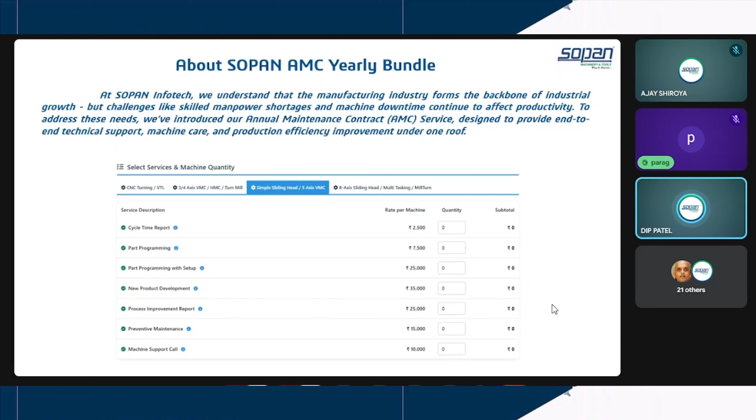Other than that, we are also providing engineering services: design CAD, analysis CAE, CAM, CAE, 3D printing, and also product presentation work.

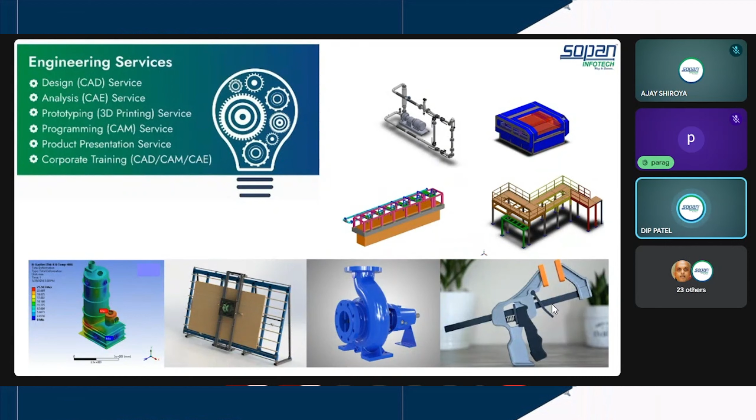If you are not working on a large scale and you just need service-based work, like CAD design, FEA analysis or simulation work, or CNC part programming, then you can just go through our website or contact us. We can help you.

So now we are going on our main topic, cabinet vision. Cabinet vision is a product from Hexagon, and the product is basically mainly focused on only panel work. If you are doing solid wood work, it will not help you. Many of you have the doubt whether this product will work on solid wood or only on panel work - cabinet vision will work only on panels. If you need any kind of panel work, you can do it in cabinet vision.

So what is cabinet vision offering to us? As you can see on the slide, the right balance of powerful features and ease of use. If you are creating closets, kitchen units, living rooms, also residential projects or commercial projects, you can do everything in our cabinet vision.

Mainly the cabinet vision product is not only focused on design. We have a complete solution of design to production. It means if you are designing, then you can render the photos just like you can see on the screen. You can render it, you can create reports, and after that you can create optimization, and also you can get CNC output of the panel work.

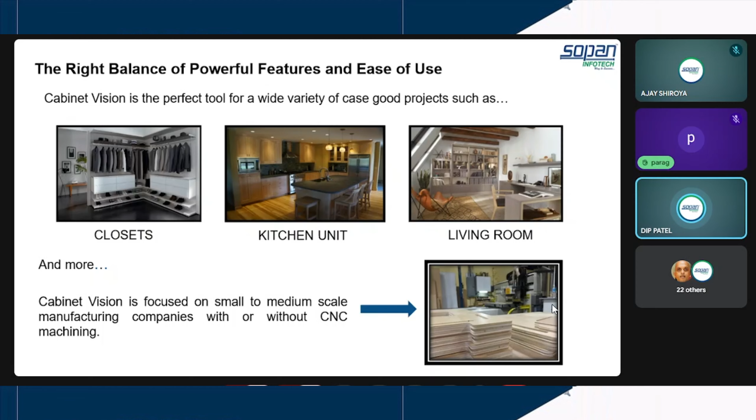So these are the market panel processing. If you are working in residential or commercial projects, you can get this in our cabinet vision.

So we will go through the traditional method that our industries are currently using. First, if customer comes, then we have to design it. After that, we have to render it to show that after completing your kitchen process, the final output will be like this.

After that you will create bidding - if you are asking what bidding is, that's just quotation for you. After that you will create the report of what ply you will use, what materials you are using, hardware, laminate or everything - it covers in the report.

After that, we have to create drawings, so we can get the workers and they will check what are the measurements and what we have to do on the actual site position. After that, you will optimize those panel products, and then you will go to production.

So basically what is the industry currently doing? They are using some other software for designing, some other for rendering. Then they will use Excel, or create manually a report or bidding. After that, they will again use some other 2D CAD for the drawings. After that, they will use other software for optimization also, because in the same software in which we are doing designing or rendering, we can't get the optimization or the CNC codes. So currently they use multiple products for the same single output.

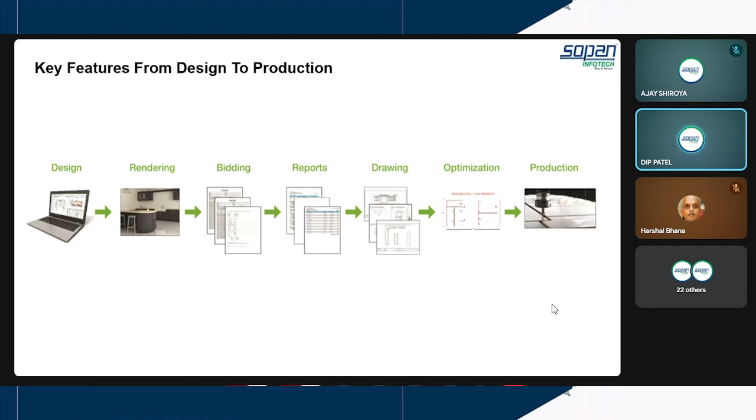So the first topic was the design. If any one of you is from the design field, you know that if I have to create a design, I have to do some groundwork, just like go to the site, take the measurements, and then create a 2D diagram of the entire project, whether it's the kitchen, the entire home, or an office. I have to create the entire project in 2D.

After that, if I show the customer this 2D plan, the customer will say this can also be provided by the builders. So what we have to do is, if I have created a 2D drawing, I also have to do it in 3D, because the customer doesn't get the idea from 2D drawings alone. We are from the industry so we understand 2D drawings, and the carpenter will also know what is mentioned in them.

So in Cabinet Vision, you don't have to create the entire project like traditional methods. What are the traditional methods? If we take AutoCAD as a reference, we have to create a single line from the wall, then create a single cabinet, then tables, and whatever else we need in our project. We have to create each and everything by hand.

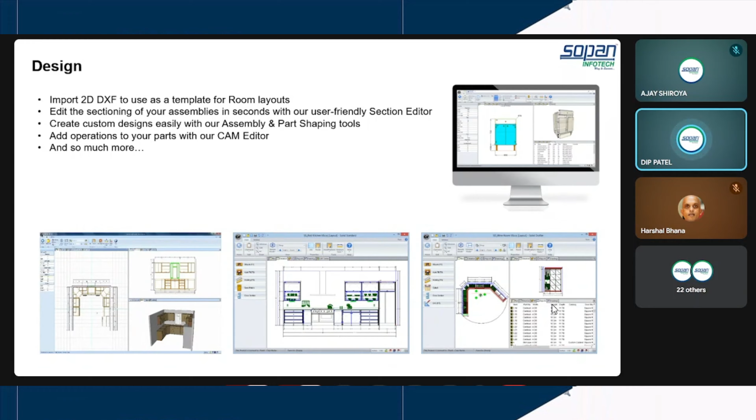In Cabinet Vision, you can just drag and drop whatever you need. If you need a cabinet, you can drag and drop it from our library. If you need a chimney, a gas stove, whatever product you need, you just drag and drop it. We have a basic library of cabinets, closets, and upper cabinets. Other than that, if I need some customized cabinet for a project, I can create it and save that single cabinet in my library, so in future if I need one, I can just drag and drop it from the library into my design. Next step is rendering.

As I said, if I have created the design in 2D, I then have to create the 3D for the rendering work, because the customer needs the final output so they can visualize which color will suit or which type of design they require. In Cabinet Vision, you don't need to create the 3D model yourself, and you don't need to use another software. You just drag and drop from our library, whether it's a cabinet, closet, or upper cabinet, and the software will automatically generate the 3D part.

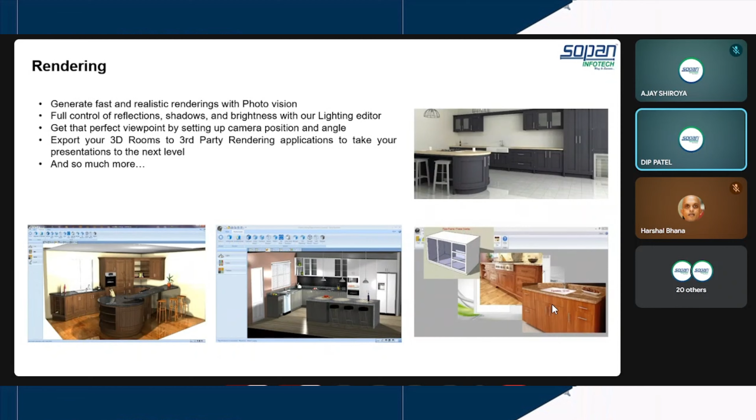Also, you can generate the rendered product. So if the customer requires the final rendered photo of what the kitchen or office looks like after the final work, you can show it through the rendering in your software.

Then we have a bidding module. What is the bidding module? When a customer comes to your office, traditionally we have to remember everything, like material prices, rate tables, and labor prices. In that case, we can't properly quote what the customer will have to pay for the project. So in the bidding module, there are some options: you can set your material price, set discounts, set the rate table and labor charges, all within Cabinet Vision. So whenever a customer comes to your office and you finalize their design...

After that, you have a complete quotation type report: what are the products you are giving to him and what is the costing you are giving to him. Okay, so you have a basic idea of the costing, so you can negotiate better with the customer.

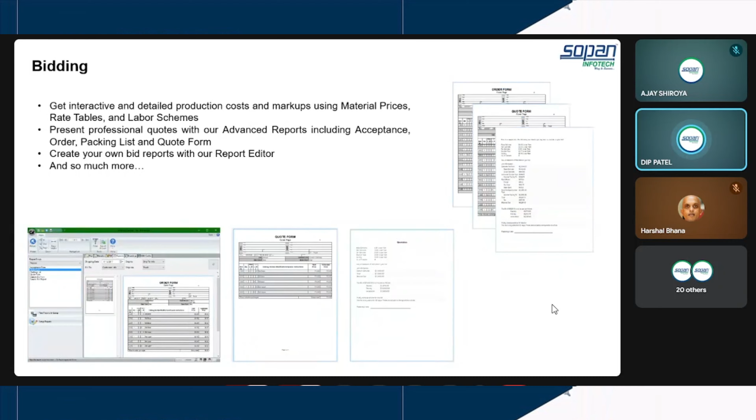So then next we have a report module. So basically, bidding is for the customer and report is for our use. Just like if I am creating the kitchen or I am creating the office work, okay, an entire office project, then I need an entire list: how many plies, how many cabinet hinges, what are the drawer boxes, what are the glasses, what are the panels, how many of them I need. Everything is mentioned in the report, so you can get a better understanding of your material requirement.

Okay, so in Cabinet Vision, you don't have to create a separate material summary, just like a cut list or door list. You don't have to create it separately. You will create this design, and our software intelligence will portray the report of what you have mentioned in the design. Okay, I will show you in a practical demonstration so you can get a better idea of it.

Okay, then next we have drawings. As I mentioned, if we have to create drawings, then we have to first finalize the 3D model. After that, I will give it to my designer and he will draw the drawings just like I have shown in the images. Okay. But in Cabinet Vision, you don't have to create them manually. We have software intelligence. You just select elevation, assembly, and part sheet drawings, and just by a single click, all of the drawings are created by the software.

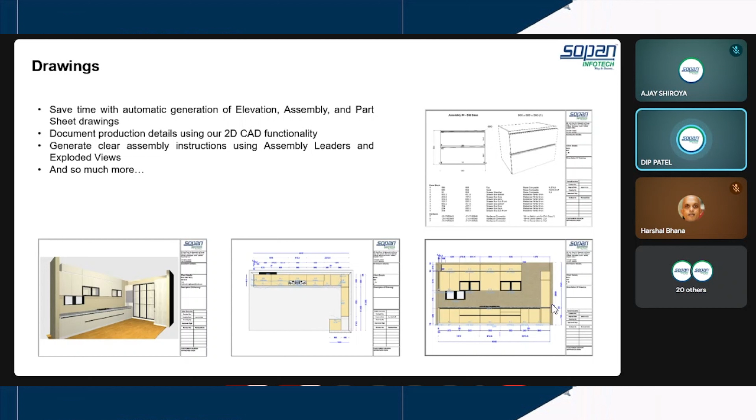If you can see at the bottom, okay, I have the planned 3D model. Then I have a top view of the model. Then I have an elevation view. Then I have an assembly sheet. You can get everything by just a single click.

After that, we have to optimize the product. The design is final. Okay, the quotation was final. Now I have to take the cutout from the machine. Then what are the traditional methods? What are people doing currently in industry? They will just cut out manually by panel stock, or they will just use the CNC machine software. Okay, they will manually input, like I need a 4 by 8 panel stock. Okay, and what are the panels, what are the sizes? Just like 300 by 200 mm, I need a cutout. I need a 200 by 200 cutout, and they will do it like this.

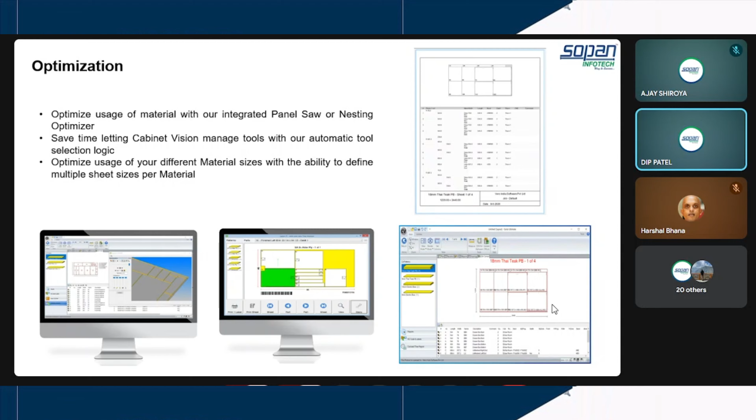But in Cabinet Vision, by a single click, you can nest all the sheets, however many materials you have used. Okay, if you are using 2 or 3 or 4 different types of material in your projects, then the software will automatically optimize each and every material and give you the final nesting output or final CNC output. After getting the CNC output, the machine will generate the NC code. You just need to put your NC code into the CNC machine, and the machine will cut out your entire project. You don't need to do it manually.

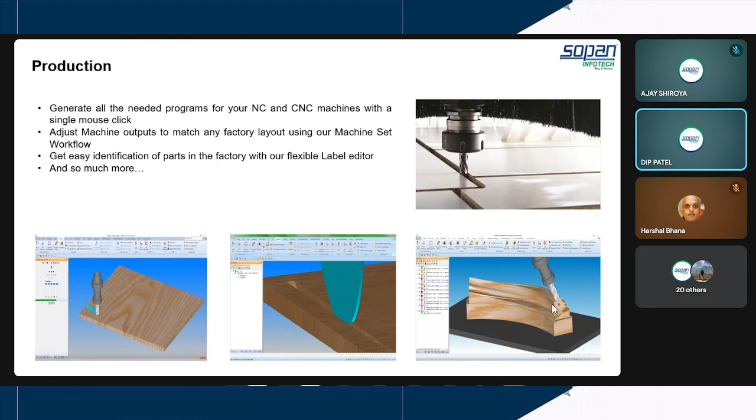Just put what sheets you are using, what the thickness is, or what the size of any panel stock or plies is. Okay, our Cabinet Vision software will automatically create the entire NC code for you. Okay, so for that I will show you. Wait a minute, I will just share my screen. Okay.

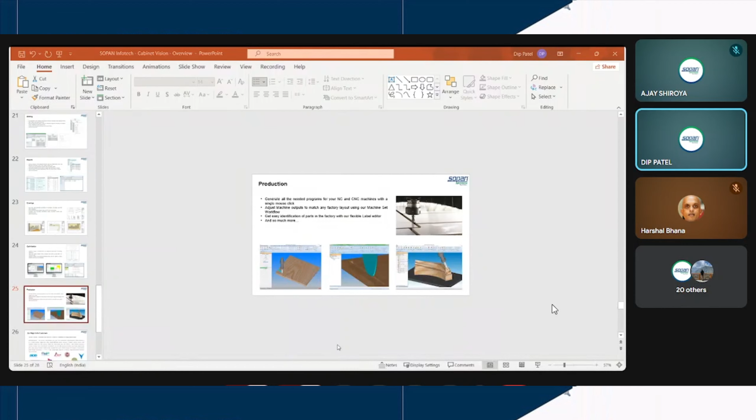Okay, hope it's visible. Okay, so now we are in Cabinet Vision. This is the basic window, the main window of Cabinet Vision, just like any other software we have, like Word, any CAD designing software or any machining output software. Here we have new job, open job, job recovery. Then we have catalogs, construction methods. Then we have open. Okay, so these are the options, and you can also access them from here.

Also, we have the recent job list, recent places. You can see it, and you can just identify this. This window is similar to your other software. If you are using any other software, you will just get the idea. Okay, so basically Cabinet Vision works on a design and panel stock basis. Okay, so what is it? I will show you. You just have to create a new job.

By clicking new job, the... we just say project, and the software will say new job. If we are starting our new job, then you have to write down some information, just like what is the job name. Okay, so just like I am showing you, SOPAN test model. You can mention PO number, you can mention description. Also, you can add customer name, address, city, contact mail. You can add everything.

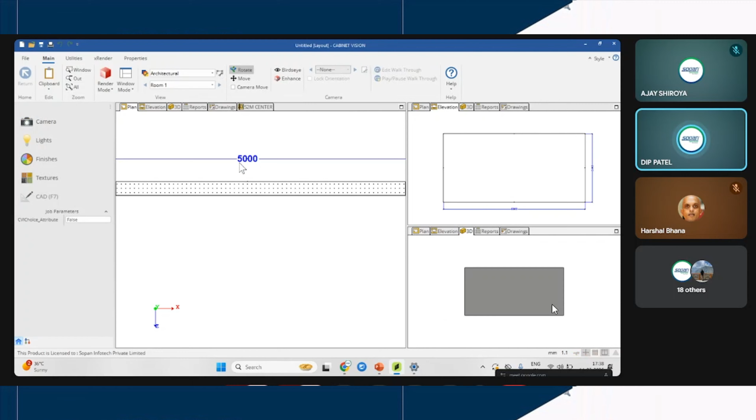So I will just split my screen. I will create the elevation here and the 3D here. You can see that this is the plan view, this is the elevation view, and this is the 3D view. You don't have to create the plan view, then the elevation, and after that the 3D. If you are creating the 2D plan view, the software will automatically create the elevation view. The software will also create the 3D view. Just see.

I will go to the normal window. Now I will place an object. So here is the material library: wardrobe catalog, then custom cabinets, meaning base cabinet, wall cabinet, tall cabinet, vanity cabinets, whatever you want. If you need anything other than this, you can just create it in Cabinet Vision and add it to this library.

After that we have a library of appliances, like washer, dishwasher, cooktops, small appliances, whatever you need in Cabinet Vision. You can also add appliances. If you have a 3D SketchUp model, you can add it in Cabinet Vision. Then we have some furnishing models, like different types of doors, windows, kitchen appliances, baths, toilets. You can use them from here.

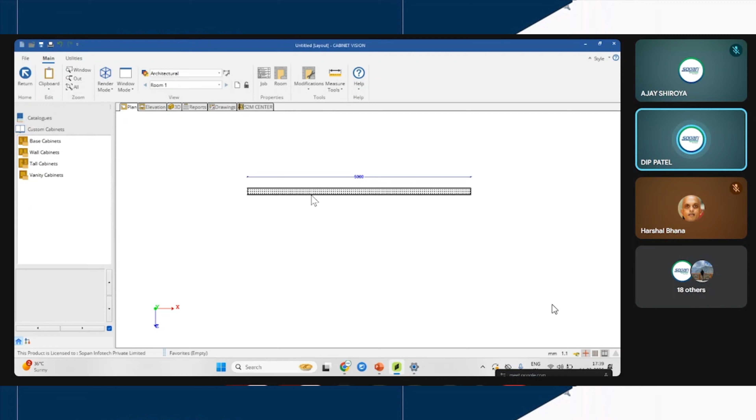Now I will show you what to do if I need just base cabinets, 4 to 5 base cabinets and 4 to 5 wall cabinets. Just base cabinet. I have a library: base cabinet, 45 base corner, 90 angle base corner, drawer stack. Different types of cabinets are here, which the standard companies are using. I have split my window so you get a better idea that you don't need to create an elevation or 3D view separately. So here I need a standard base.

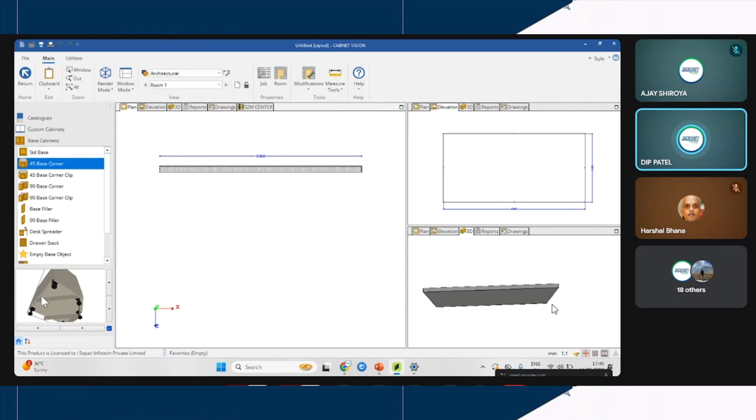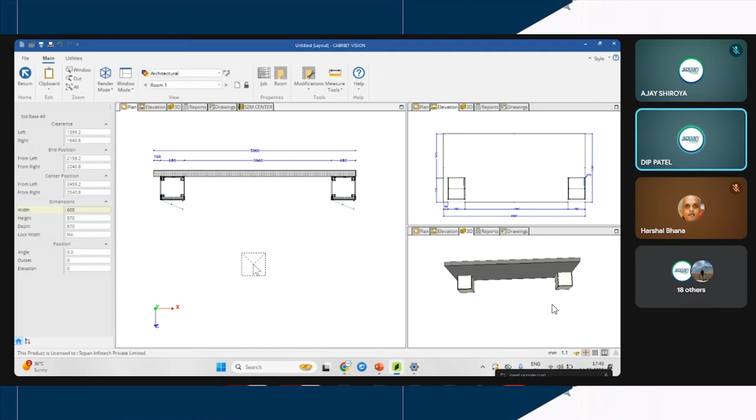If you click the product, a small 3D window will open, so you can identify whether this is the product you need or you need another one. I need a standard base, so I just drag and drop it in here. You can see I have just dragged and dropped from the library. This is the plan view, this is the elevation, and this is the 3D view. I don't need to create the 3D model. The software will automatically create it, and whatever products we design in Cabinet Vision and save into the library will also be saved as 3D models.

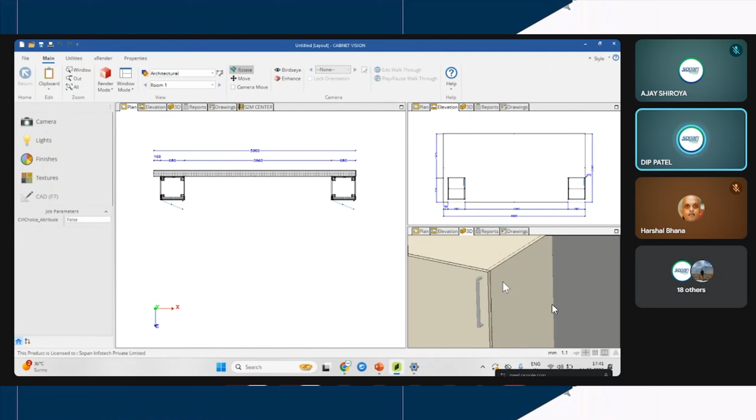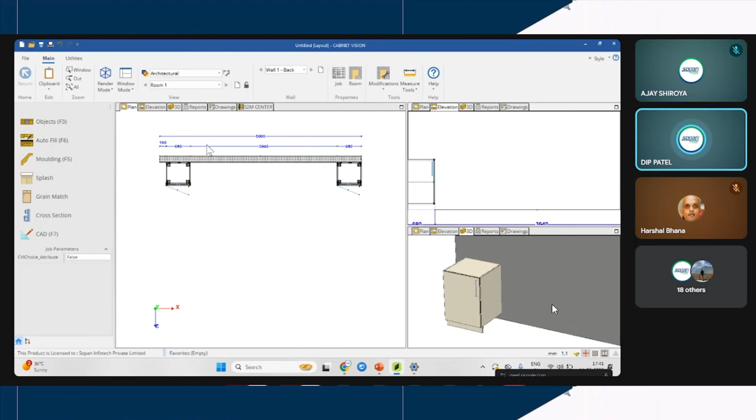Also you can see that I didn't mention any dimension, but the software has automatically added all the dimensions, like the 5000 wall, the cabinet width, the distance from the left, the height of the cabinet. You can also see it in your plan. The software intelligence also works here.

If I need a cabinet from the start of the wall, what will I do? Just drag, and I will place it here. The software will automatically recognize the placing of the object and place it at the start of the wall, just like here. You can see it in the 3D model.

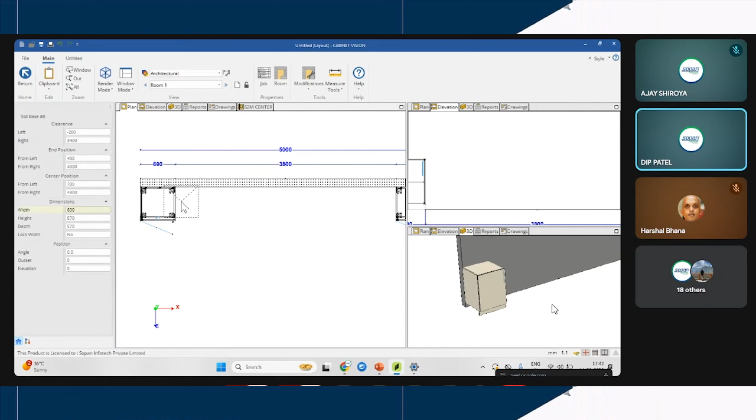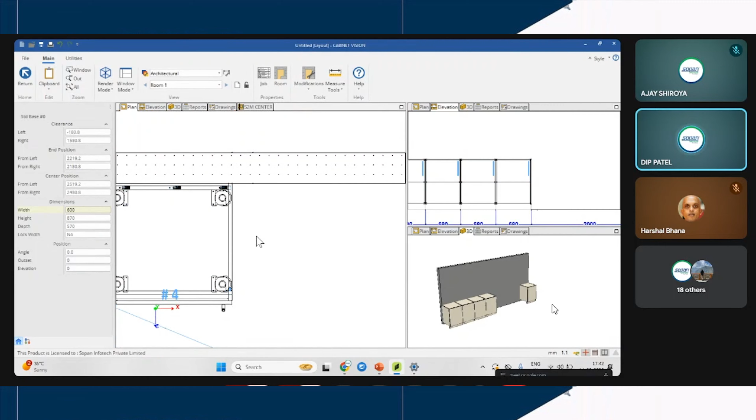Now if I need another cabinet close to this cabinet, I will just overlap my placing, and the software will automatically place it, just like this. I don't need to match the center point or the lines for the complete placing. You can see it here. I am just overlapping the cabinet and the software automatically places it in the space.

Also, you can change the width, height, and depth of the cabinet here with a single click on the cabinet. I just need to change the width of this cabinet. You can see it here is 600. I need it 800, so here I will just type 800 and enter.

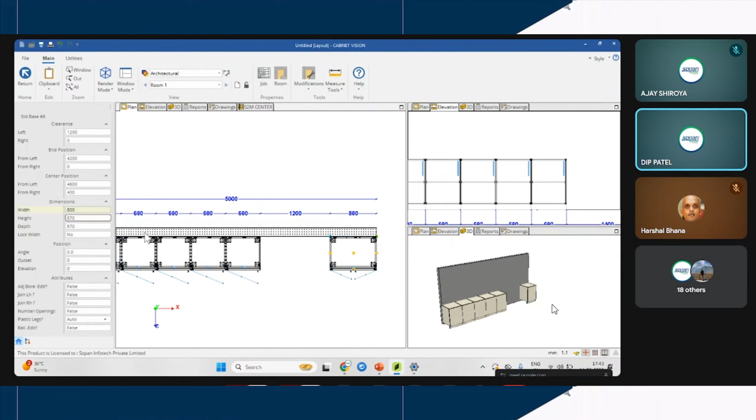Okay, you can see the cabinet is converted into 800. So by just simply applying your dimension, the software will convert your single cabinet to a double door cabinet, or whatever changes you require, like width, length, height, or positioning.

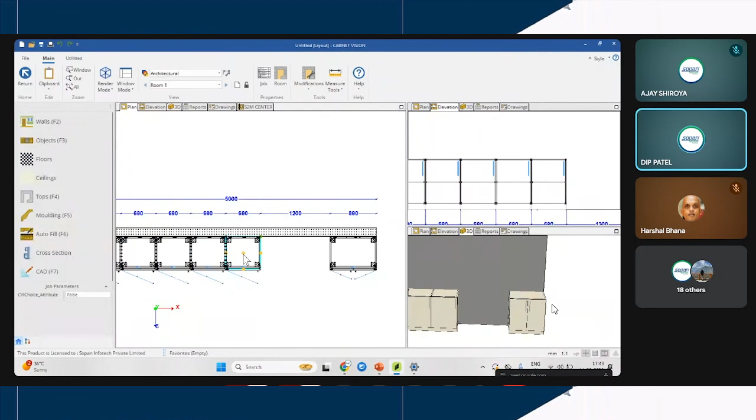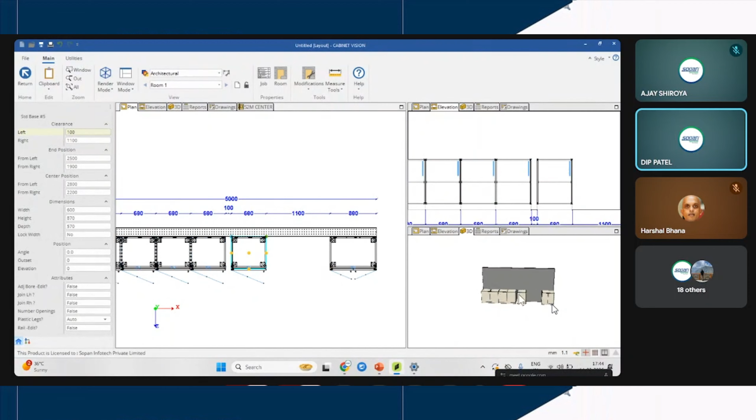Okay, you can see the clearance from the left side is 0. I need a 100 gap from this cabinet to this cabinet. Then what I will do, I will just type 100. And the cabinet automatically changes its place. You can see it here, we have a gap of 100.

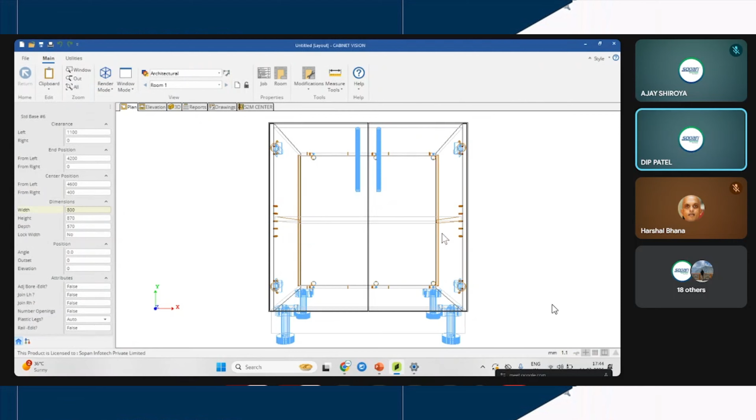Now we will go to the customization part. What customization can you do? I will open it by simply double clicking on the cabinet, and you will go into the cabinet mode. If you require 2 doors, shutter doors, drawers, whatever requirement you have, you can change it in the cabinet, or this is the assembly.

So you can see here that we have 2 different types of modes, section face and section interior. Whatever you have to change outside, you can do it from section face. Just like I don't need these doors, I will simply click and delete. Now the doors are not here because I have deleted them.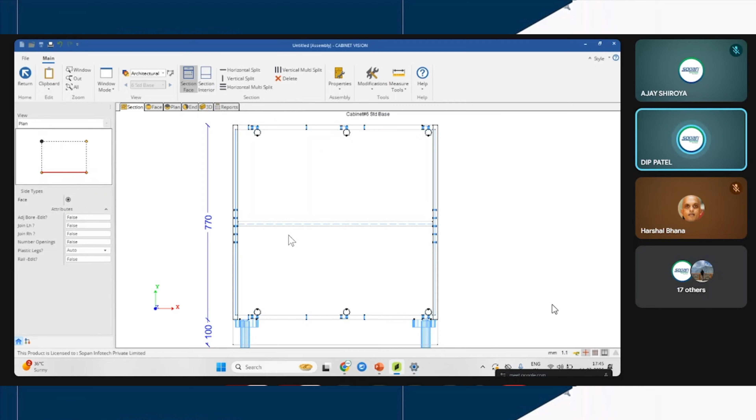I can't delete the inner section, just like this shelf. It will not allow me to change anything from inside. So I have to go to section interior. I don't need this shelf, I will delete it. If I need 3 horizontal shelves, I will select the horizontal multi-split and click on this empty area where I need it.

You can also change it. If I don't need equal spaces, then you can change your heights. Just like I need this section at 250, so other than this space, the 2 are matching the total dimension of this cabinet.

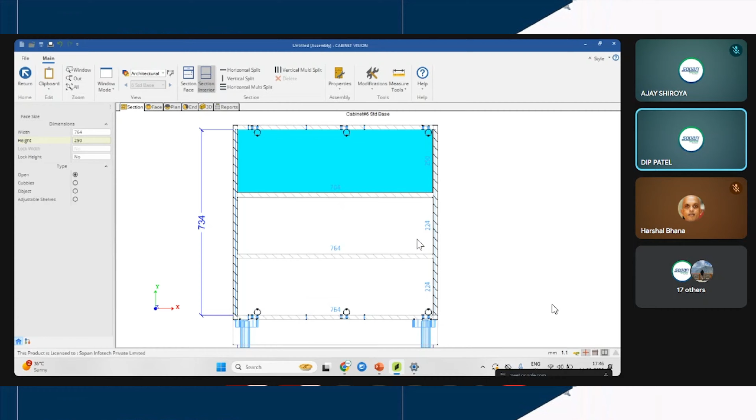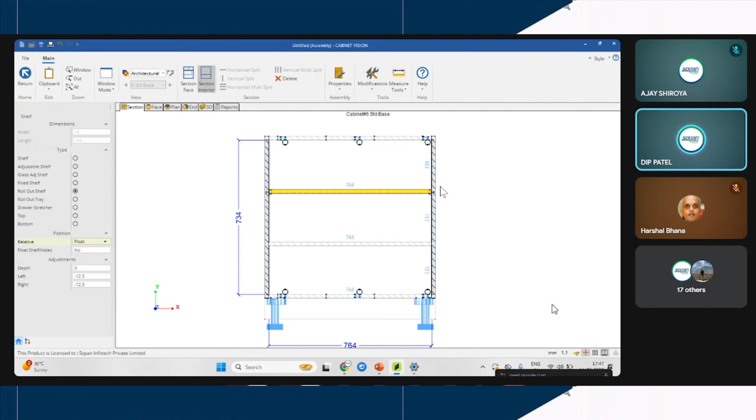Also, if you have created a shelf and you need to change it to an adjustable shelf, you can do it. You can also create a glass shelf, fixed shelf, or if I don't need a shelf, I will do the rollout shelf. So you can see the software automatically added the channels here.

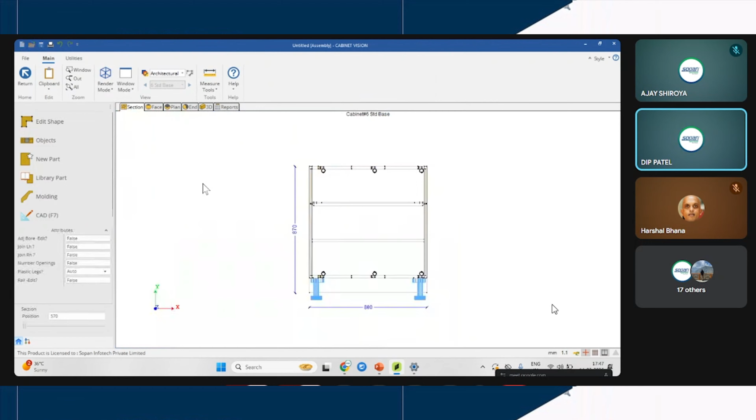Also, you can create the rollout tray. Just like here, I have selected it. Wait a minute, I will show you what the rollout tray is.

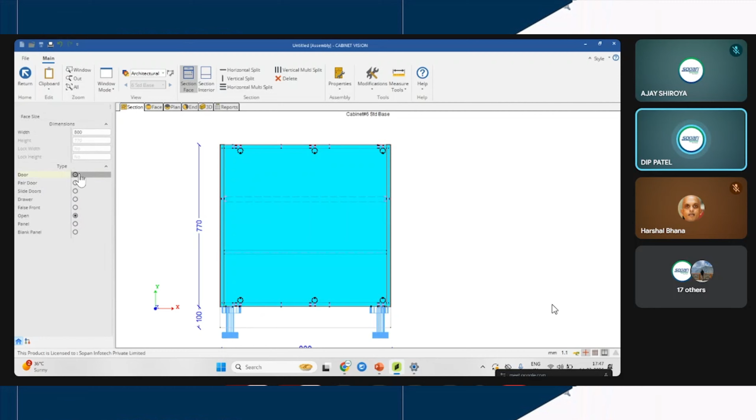Now I need a door. Then I will go to the section face. I just need a single door, a pair door, or a slide door. Wait a minute, I will open the split window so you have a better idea in 3D.

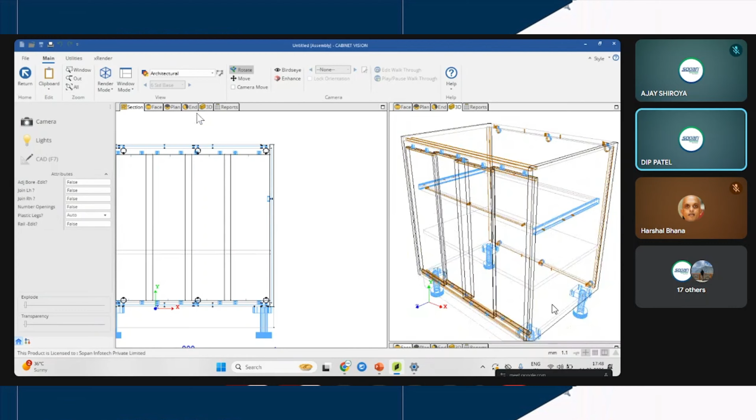So this is the sliding door, but I don't need a sliding door. I need drawers. Then I can create a single one. I have not mentioned the partition, so the software automatically made the entire cabinet into a single drawer.

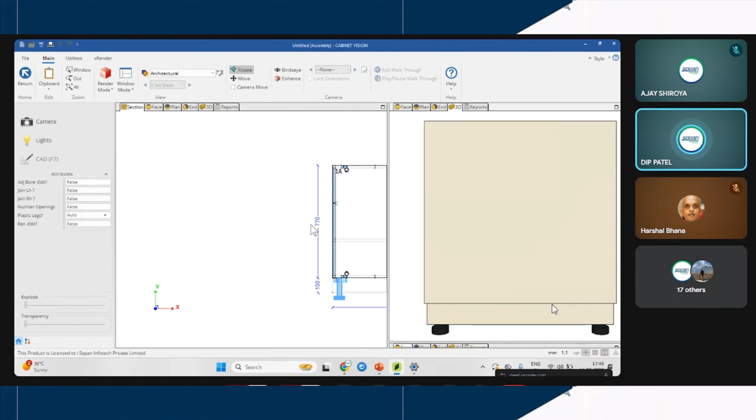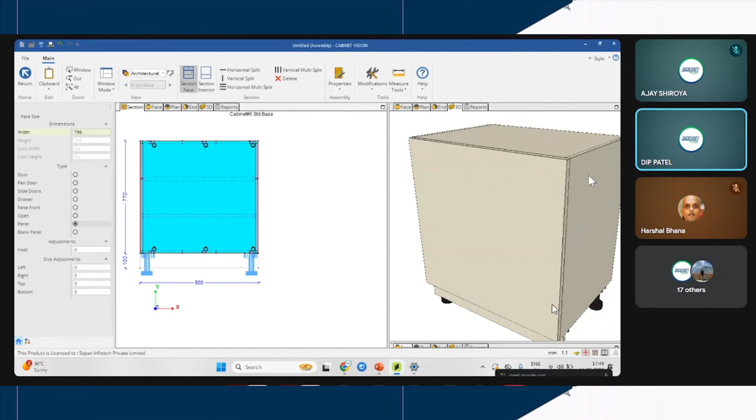If I need a false front and no door, you can also create it. Or if you need an open space, you don't have to create a door or drawer, just select open, and you can see in the 3D model there is an open space. Or if you need a panel, you can select panel, and the panel will apply here.

Okay, so let me change the pair door. First, you may have a question: this handle is on the right side and the hinges are on the left side. I need to change the positioning. I can simply change it by changing the hinge position. If I need it right, the handle will go to the left and the hinge will go to the right.

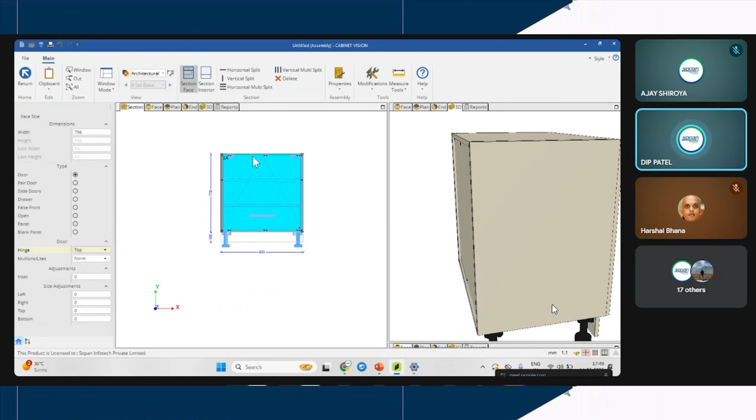If I need it on top, then the hinge will go to the top. You can see it here, and the handle will be at the bottom. Okay, I will just put it back on the left. I need a pair door. I have created the pair door.

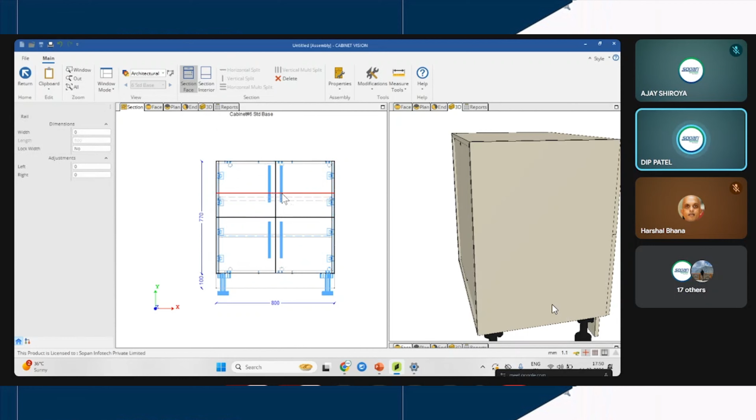Still, if I need a drawer section here, then I will just change the positioning, and I have created the drawer. If you look at the 3D model, here at the bottom there are two doors, a pair door, and here is the drawer. I will open it for better representation.

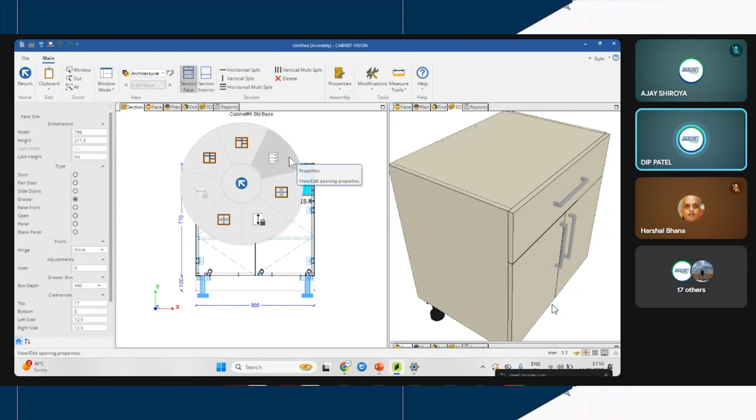You can also check it by opening and closing it. I have opened it, so you can check it in 3D. The drawer is open, if you have to show the customer how the cabinet will look. So you can check it here.

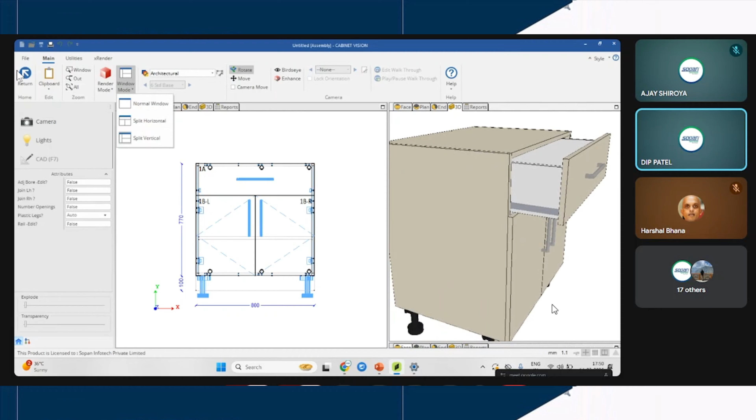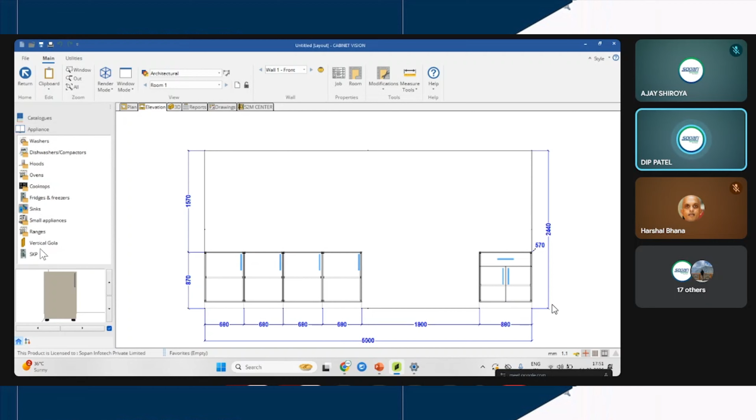Now I have to create the elevation. If you want to see the elevation, this is the elevation view. Let me just delete this cabinet. If I need any appliances, like a fridge, I will go to the fridge section, whatever size you need, and just drag and drop it here, just like a cabinet. Now if I need an oven, a single oven,

I can also place the oven. But this will not show in the report how many ovens or fridges or other appliances you have used in your kitchen. This is just for reference or a rendering image for the customer, so the customer gets a better idea.

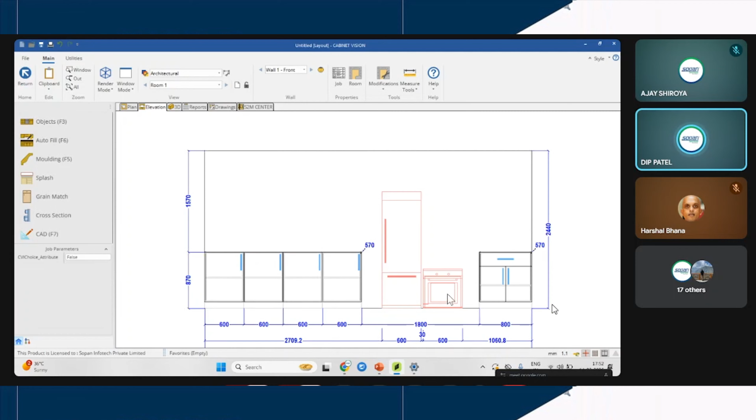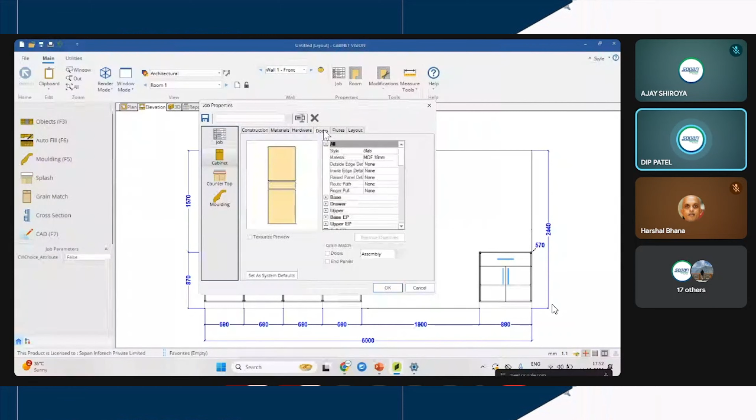Now I just delete this fridge and this oven. Now you can see the entire project in 3D. As I mentioned, if I need to change the door, I can change the entire project's doors separately. I will go to the door and choose another material, whatever I need. You also have a preview mode here, so you can check your material.

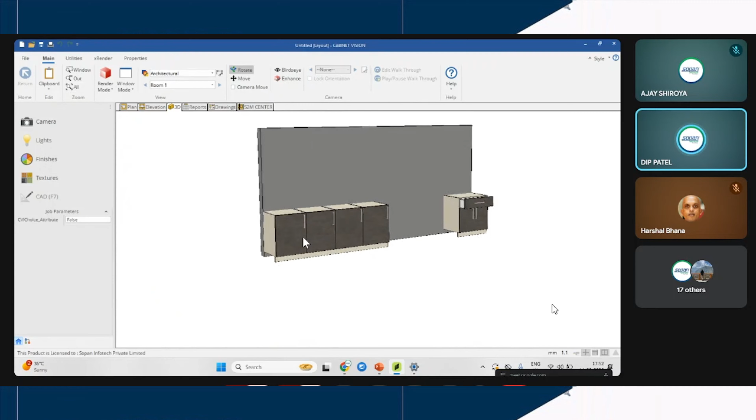I choose dark gray Chicago, and the software will automatically update the entire project. You can see that first we had the same material as the cabinet, and now the entire project's doors are changed.

Now we will go to the report module. As I mentioned, here we have an inbuilt report. Here I have created the reports, and you can see the cut list report: the cabinet size, the material you have used, how many adjustable shelves, decks, whatever you have created in your 2D or 3D design, the software will automatically mention

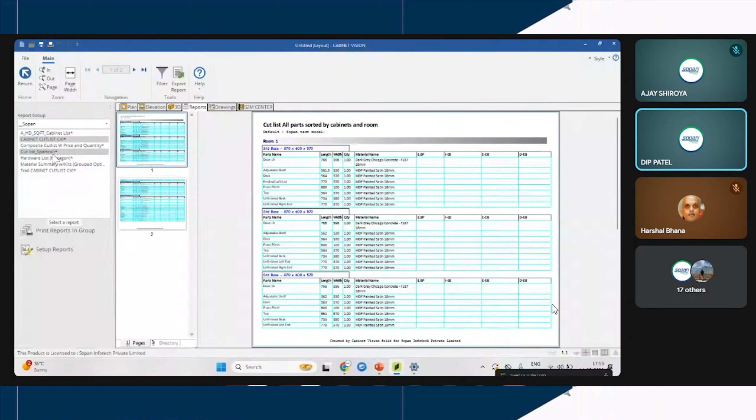it in the report. If you need a hardware list, you can just single click on hardware and each and every hardware you have used in your project will show here. Now if I need drawings, you can create them manually, just like in AutoCAD or any other software.

Also, I will go to the plan, and I need a plan and elevation sheet. I will select plan view, select all, and go to the drawing. The software will ask me for the paper size and orientation. I have selected A4. Then I need an A4 assembly report.

The assembly drawing shows which base cabinets and assemblies I have used, like the drawer, pair door, single door, adjustable shelf, whatever I have used in the cabinet. I follow the same process, selecting the paper, and okay. Now I will go to the drawing, and you can see the entire drawing is created by the software.

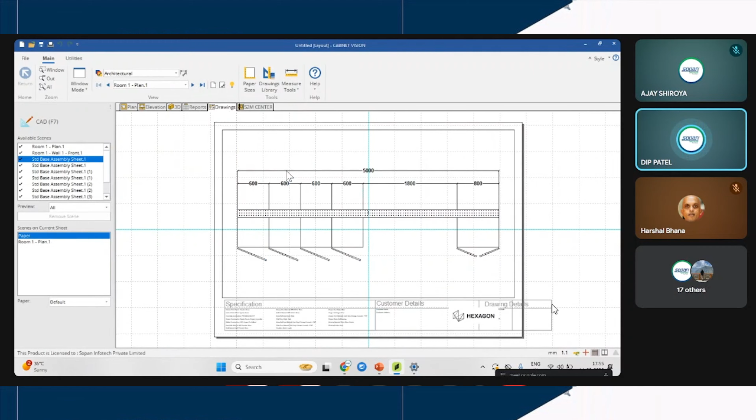I don't have to do anything for the design. You can just go over here. This is the plan view, this is the elevation view, and you can see the assembly. Here I have created this setup.

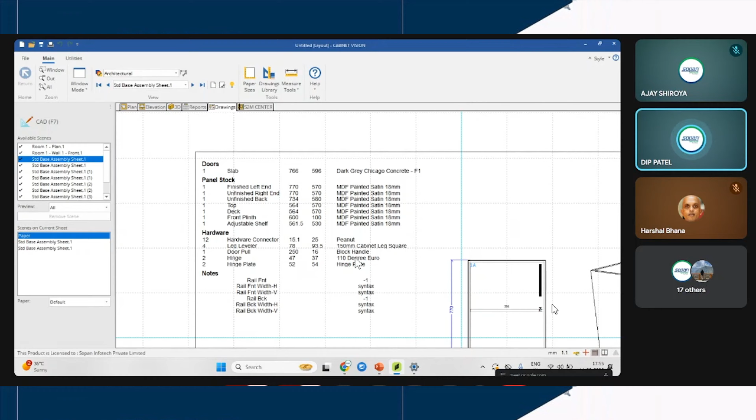For this particular assembly, whatever the door material, what is the size, what is the panel stock size, what are the hardwares, whatever the module or setup you have created, the software will automatically show it here.

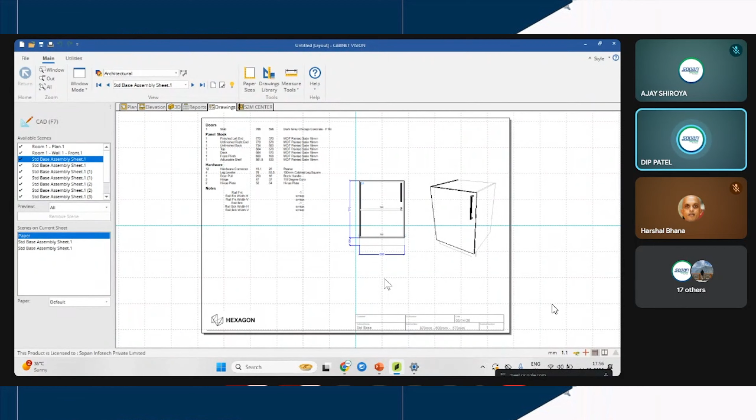You can also create your customized template in Cabinet Vision, or if you have already created one in other software, you can import it by DXF file. Now as you can see, I have created the plan, elevation, and the final 3D is okay. The report is okay, the drawing is okay.

Now I need a report and an NC code for the machining purpose. I will go to the S2M center, and the software will create the part list and optimize our entire project. It will take a few seconds, and then we are directed to the S2M center.

Here you can set the optimizer parameters, and also add off-cuts, then optimize. Also in Cabinet Vision we have a unique feature where you can filter parts for whatever machining you need. If I have created two rooms differently but just need a single cabinet for the machine output, I can filter it out from here.

Just like here, I have selected this single cabinet. You can see the single cabinet is filtered here. I need all of this, and I have created it.

Now the machine post processor is mandatory in this section. Whatever machine you have - whichever company, Homag, Nanxing, or different types of machines like panel saw, beam saw, drilling machine - you just have to ask us and we will share the post processor for your machines.

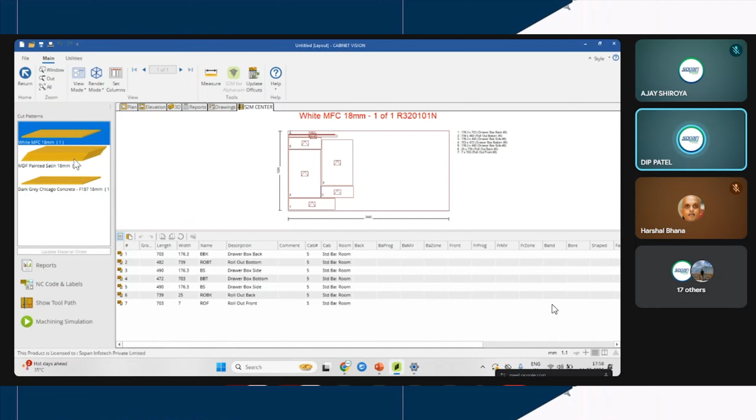I have created it, and you can see it here. I have used three different types of material here, so the software shows each and every part differently. Just like this is MDF painted - these are the different materials I have used in this entire project.

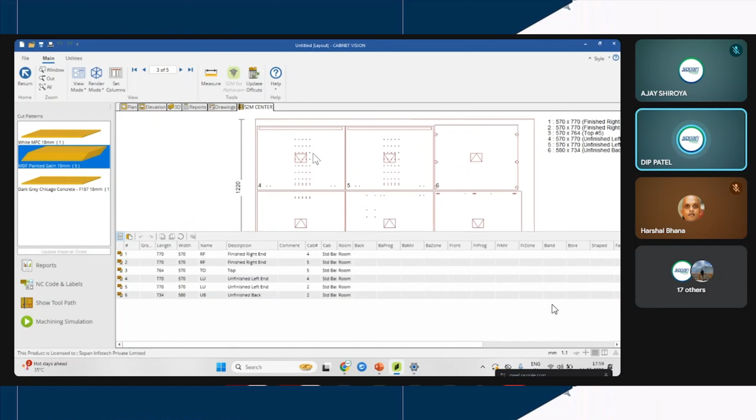The software can also give you the sheet numbers you need, the panel stock numbers you need - you can go over it and check it. Each and every operation is mentioned here, just like boring and hinge operations. Whatever operations you need, everything is mentioned here.

Now I need an NC code. By simply clicking on NC code and label, you have to mention the output path and run it. Wait a minute.

The cabinet output is okay, so the software is generating the NC codes. You can see here which panel is in process. You can also check here that out of 7, 5 panels are already generated.

You can print it out or check it. Wait a minute, I will just create an output folder for it. So on the desktop, I have created a new folder for the output so you can get a better idea. From NC code, I will just mention my path - desktop.

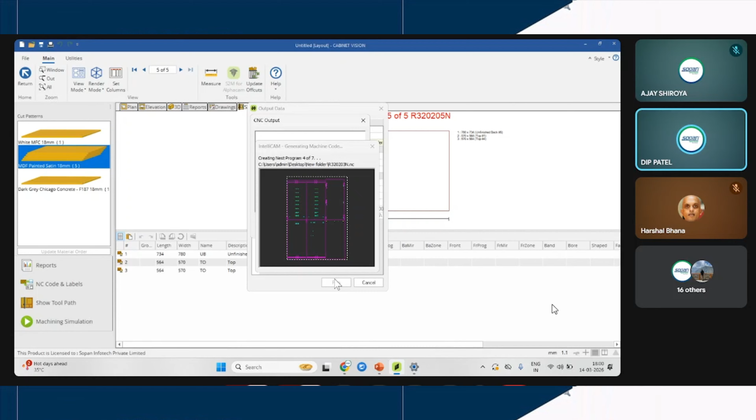Okay, so here, and run - the software will generate the NC code. Close it, and now I will show the output.

So you have these outputs - these are the outputs that the machine needs: G code, NC code, whatever operations are mentioned in the panel, this is the output. So this is Cabinet Vision. If you have any queries, you can ask me.